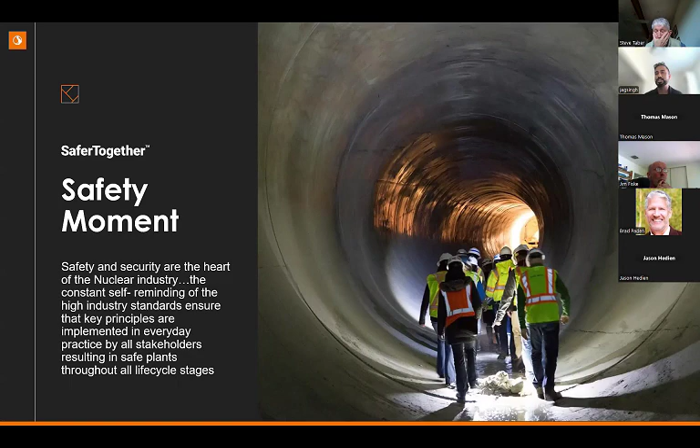We also talk about security as well. It's really important to understand that security is quite important when we talk about information and technology. We've got to be really careful. I'll touch upon it a little later in the slides when we're safeguarding information. A lot of technology here may end up having dual use, which is then subject to export controls. So it's really, really important. Safety and security in our industry go hand in hand.

We're going to talk about how that comes to fruition a little bit later.

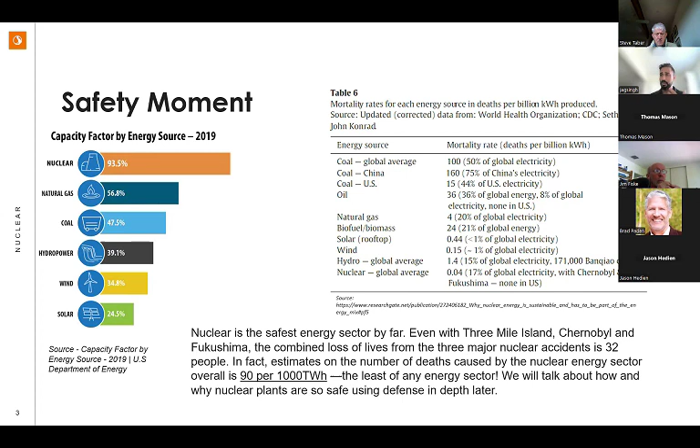So quickly, we're going to do a quick overview of the Canadian nuclear industry, because this is a very Canadian-focused PowerPoint, but I'll also touch upon the US since I have a foothold there with some of our team members. We'll talk about conventional reactor technology versus Gen 3 and Gen 4 SMRs and the difference between them, some concerns in safety, waste, and cost, some stakeholder organizations - skewing towards the US industry - design considerations, sector figures, and general infographics, which I find really useful in relaying messages, much better than just blocks of text on the slide.

So this is currently the Canadian nuclear market. Specific to SMRs, we've got utilities with SMRs within their sites, deploying those within their respective provinces. That's NB Power for New Brunswick, looking to put an ARC-100 reactor, a Gen 4 SMR, at their Point Lepreau site. Everybody's hopefully aware of OPG and what they're doing with Darlington, where they've got BWRX-300s. And most recently - I work very closely with SaskPower, now called SaskNuclear - they've recently identified the Estevan site, which will have two BWRX-300s going in there.

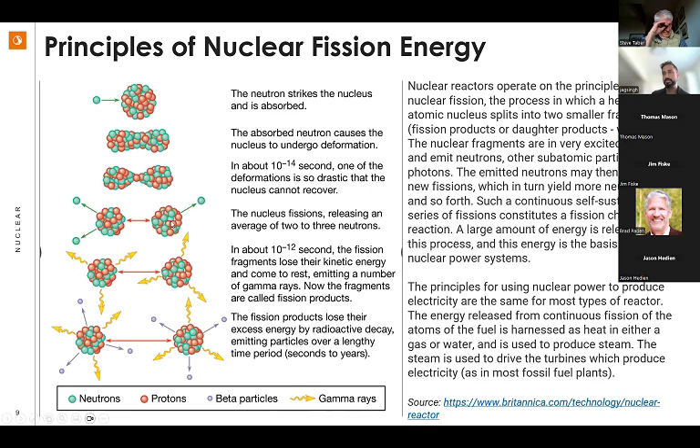So all the reactors in Canada have uranium as a base fuel, and right now in the conventional reactors, they're solid metallic fuel pellets. But some of these advanced small modular reactors, the Gen 4 small modular reactors, are starting to use liquid fuels.

The company I worked for before I joined Stantec is a company called Moltex. I was head of their engineering team there, and we were developing an advanced SMR, Gen 4 SMR, and we actually used liquid molten transuranic salts as the fuel. So it's really unconventional to use a liquid nuclear fuel, but that's the technology being developed right now. I believe even in the US you had the EBR2 prototype reactor. So although this technology is coming out as being this whole new foray on the frontier of science and technological innovation, SMRs have actually been around for a very long time, either in prototype phase or you'll find them in the back of a nuclear submarine or for maritime purposes.

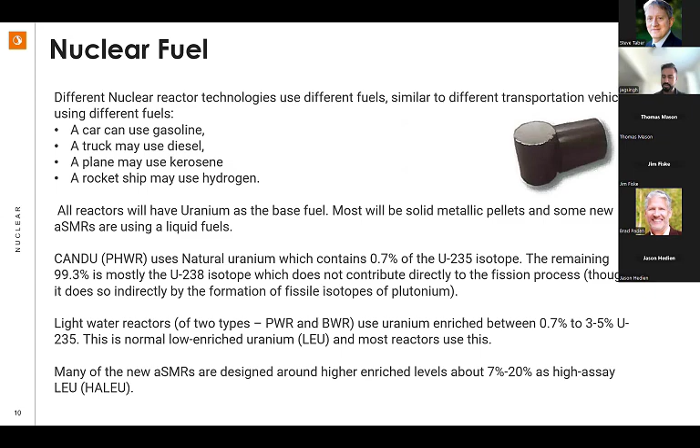Many of the new advanced small modular reactors actually have enrichment levels of 7 to 20%, and that's where we hear the term HALEU. A lot of SMRs use HALEU. We'll go into some of the problems with HALEU in terms of supply chain - a lot of it we were procuring from Russia, and obviously we can't do that anymore. So we're seeing this big push in the US to now start domesticating that supply of HALEU. We're going to need it for the advanced small modular reactors.

Okay, so let's have a quick look at some reactor technology types. This is a pressurized heavy water reactor. These are all CANDU reactors here in Canada, our conventional reactors that are in existence.

And this is what that CANDU fuel bundle looks like. Within each one of these pins, we have those pellets, which I just showed you, no bigger than the size of your thumbnail. We have those stacked up within each one of these - if memory serves me correctly, around 17 fuel pellets in each pin. We have 37 fuel pins that make up one fuel bundle, and one of these complete fuel bundles is represented by one of these red and orange blocks right here. That's the nuclear fuel.

And what we do, we circulate that heavy water, which is deuterium oxide, D2O, to get the right conditions in the physics, which is slowing down those neutrons to the right spectrum so that we can get that fission taking place.

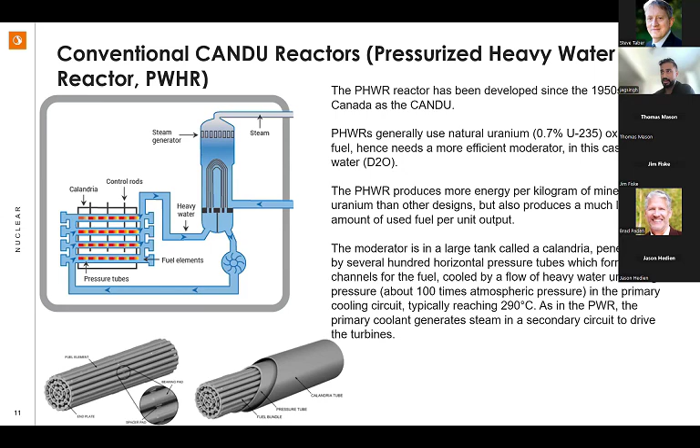Okay, so let's compare that to an SMR - a small modular reactor. Look at the size difference already - you've got a small person right here next to an SMR, and that's a core. Look at the size of what you need in a conventional reactor. We produce 300 megawatts electric typically around that range, or 100 megawatts electric, and we get economies of scale.

So we end up with a compact design, and the whole idea behind SMRs is actually machine line fabrication. You're supposed to be able to run these off a machine line, with off-site modular construction, off-site work acceptance testing, and factory acceptance testing, because a lot of the cost of construction delays can come down to having to do all that activity on a nuclear licensed site, which can make it very prohibitive from a cost perspective and a timeline perspective, because you have to have all the extra checks and balances.

One of the biggest parts of SMRs is walk away safe. In some of the reactor technology types, which I'll go into a little later, they actually shut themselves down - it's impossible to have a meltdown because they have a negative void coefficient, which means the hotter it gets, the less reactive it gets, and it just shuts itself down.

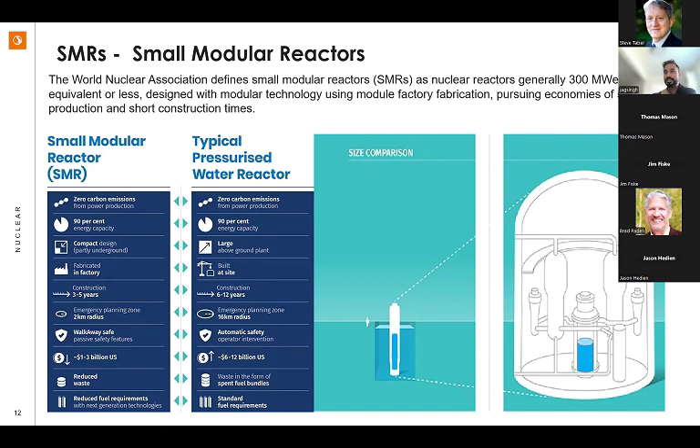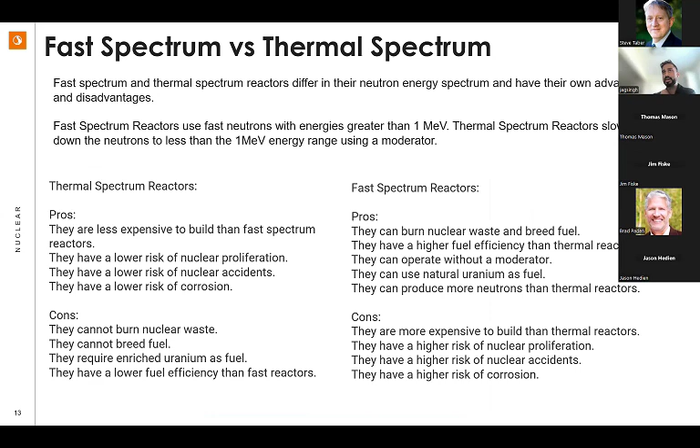Okay, and we also have reduced waste, we'll go into that in a second. I'm going to skip over this slide real quick, but there's two kinds of reactor technology types, getting heavily into the physics here - fast spectrum versus thermal spectrum, but I'll go into that in just a second with the reactor technology types.

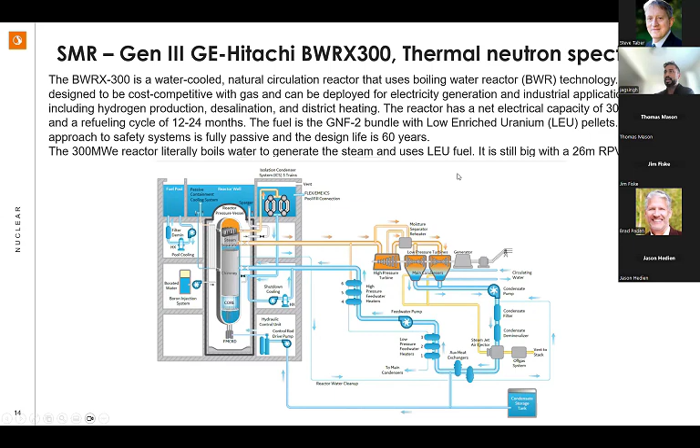We'll jump over to a Gen 4 reactor. This is the ARC reactor, which requires sodium metal coolant, liquid metal coolant. The fuel type changes here too - you end up with HALEU pellets. Because of the reactor physics and modeling behind this, you only have to refuel one of these every 20 years versus every 2 with a conventional reactor. So you can drop one of these down in a remote location and you won't have to touch that fuel for 20 years. That's currently what they're looking at.

Another key difference is the outlet temperatures of these. This is why a lot of the oil and gas industry and mining industries are starting to look at this reactor technology, because you actually produce very high temperature steam, which is directly applicable to applications such as oil sands and other heavy industrial processing.

So it sounds quite exotic with liquid sodium as the coolant, but actually prototype reactors - this goes right back to the Dounreay Fast prototype reactor in the UK. That was back in, I think, the 70s or 80s, they had that reactor technology type as a prototype.

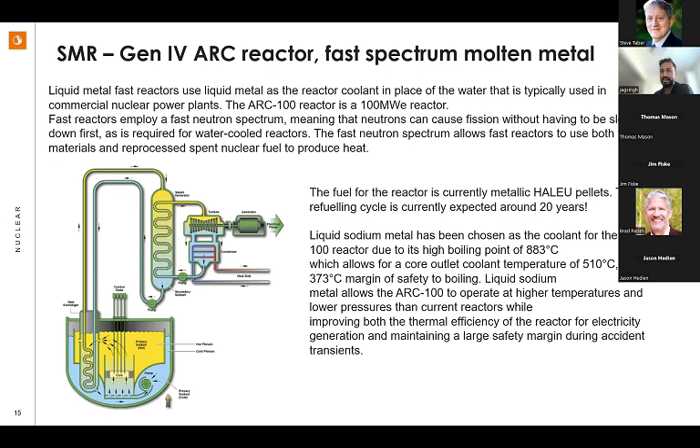Here's the company I work for, Moltex, and here we have liquid fuel in channels. Then we have a liquid molten salt primary circuit, and a secondary circuit is that steam cycle.

So we're starting to look at molten salt as an application, and the beauty about this reactor technology type is you can take existing spent nuclear fuel - currently seen as a liability across the entire world in some respects, although this technology is designed for CANDU spent fuel for now - and actually recycle that fuel and use it as new reactor fuel in this SSR-W.

What that means is, at the moment, the CANDU fleet stores their nuclear fuel in that metallic form I was showing you earlier, those CANDU fuel pellets. Actually only 20% of that is used in the fission process - 80% of that fuel pellet is still unused. So if you can separate out the 20% from the 80 and take that 80 and turn it into new fuel, you're essentially hugely increasing the efficiencies of that waste.

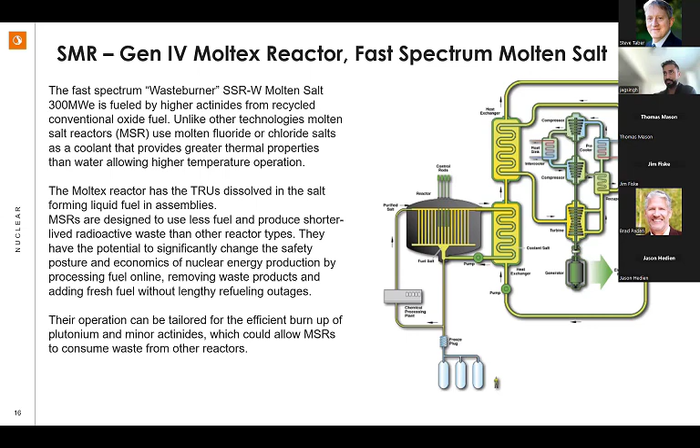Here's another one, a terrestrial reactor. This one gets really exotic - in this one you've actually got the nuclear fuel recirculating around a static core. These are graphite moderators. So you recirculate the fuel, which is really unheard of. And the temperatures you get up to are here. Again, each reactor technology has its pros and cons, but this is one in development as well.

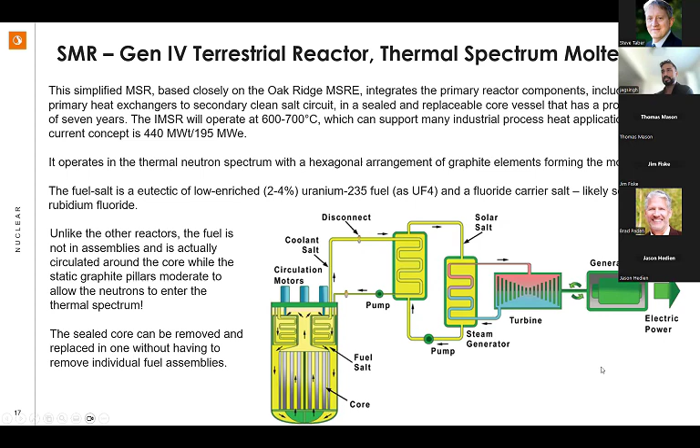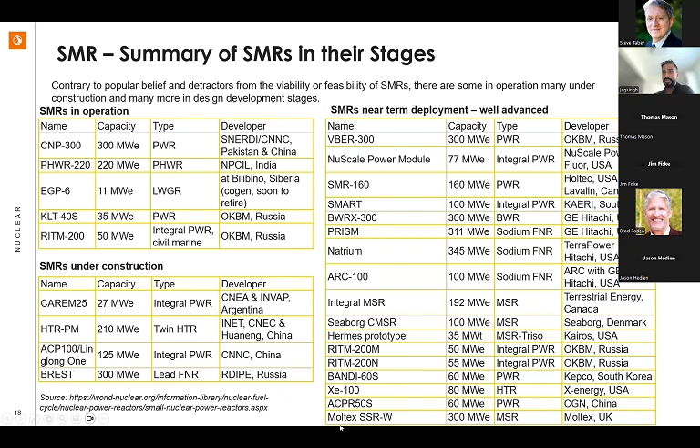So it's a really fun time for reactor technologies. There's a lot of SMRs in development stage, and there's quite a few that are actually in operation. The perception out there seems to be that there isn't any proven technology, but there is. We've got the PWRs, the heavy water reactors here in India, PWR in Russia, and integral PWR here, and there's a few under construction. It's quite important to understand that.

So we get to a few issues, challenges and concerns. Typical ones we hear are: what's the waste, what do we do with it, aren't these expensive, and they're not safe. Given historic issues with Chernobyl, Fukushima, and Three Mile Island, it's really important to start addressing these to a wider audience. So let's have a quick look at the negative void coefficient.

Here's a safety example I talked about a little bit earlier. SMRs use passive safety systems that rely on natural phenomena - we don't really have active shutdown systems anymore. The Moltex reactor actually had an emergency heat removal system which had no active components at all, it was all passive. A negative void coefficient is a great example of this as well.

This is essentially: as the reactor gets hotter and hotter, you end up with these steam bubbles forming in the coolant, which gives a negative feedback to the actual reactor. If it starts to overheat, the more those steam bubbles get generated, then that reactivity decreases - this is a self-regulating feature.

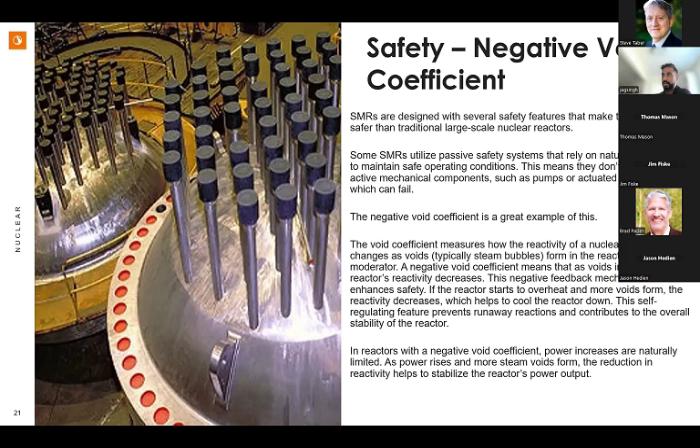Here's another one: versus the reactor technology itself, the actual fuel is now becoming safer and safer. It's a TRISO particle, and this is being developed in the US with USNC, and X Energy are also going to be using this specific fuel source in their reactors.

Where I talked about those pellets held in sheets and rods earlier, these are actually little balls, and the fuel itself is encapsulated. These pellets have been tested to withstand really extreme temperatures and harsh environments, and they keep those fission products, the daughter products, which is the waste, all retained within this particle.

So you can imagine how appetizing this becomes for either refueling or waste management or anything in between. Safety is now being innovatively ingrained, not only in reactor technology type, but the fuel itself. We're just seeing things get safer and safer.

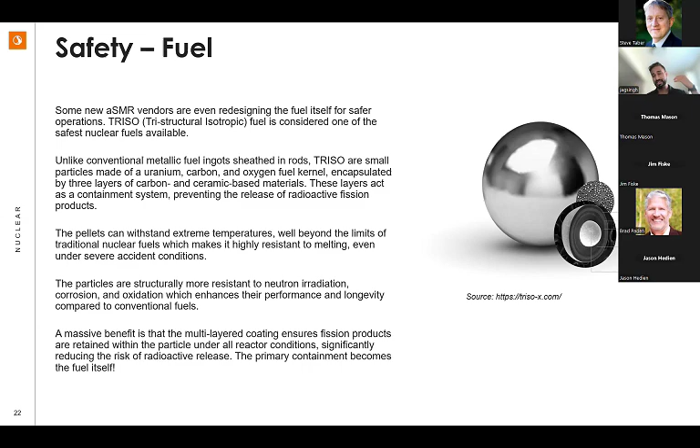When we talk about waste, it's really important to address this. Most of the waste that comes out is actually LLW, and we talked about that unused uranium, the 80% there. Only very small amounts of this is actually considered high level waste.

The reason behind that is because those daughter products, the most radioactive material produced as part of the nuclear fission process, have that half-life — it decays really quickly. So some elements and components are actually around for even a fraction of a second. So really, the more dangerous things are in terms of high-level radioactive waste, the quicker it decays away. This is why we end up having storage ponds on nuclear reactor sites.

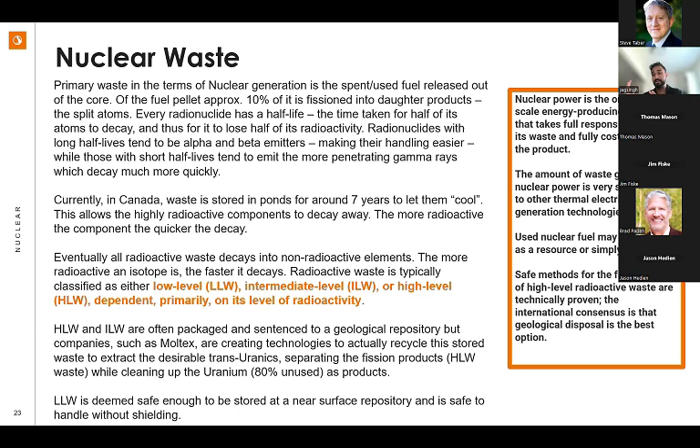As soon as that fuel comes out, it goes into a pond and stays there for 7 years. This is where they let it cool, which lets the most radioactive components within that fuel decay away. So you end up with most of that waste now being ILW and LLW. It's really important to understand that.

When we start looking at the amounts of waste, this one's really key — I'm going to get into infographics heavy here. If the US has produced roughly 83,000 metric tons of used fuel, which is the entire fleet generating over 60 years, all of that could fit on a football field at a depth of less than 10 yards. That's the entire amount of nuclear waste that's produced.

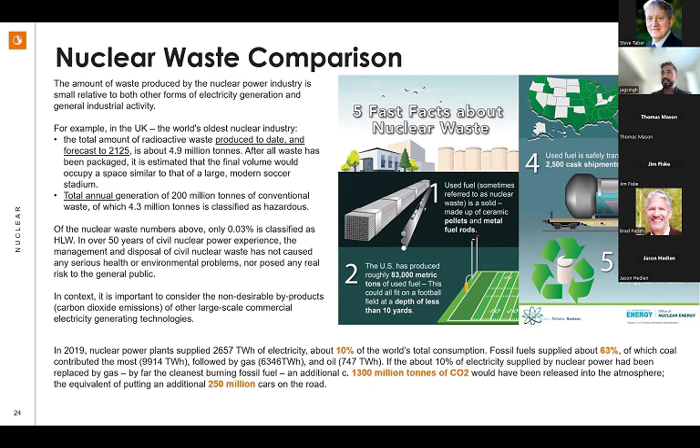So let that sink in — 60 years of the entire fleet of the US, that much energy produced, there it is right there. And it's really dense, okay? That's the reason why it's all kept within this.

Remember, this is all carbon free, so you're not having any carbon dioxide emissions as part of the process that's producing that. It's truly clean energy and it provides that stable base load as well. When we talk about solar and wind and all the intermittent supplies, yeah, they're also carbon free, but when the wind isn't blowing and the sun ain't shining, that energy capacity comes into factor, and your actual waste produced per unit of electricity generated is actually quite high.

So when we start looking at some of these, per person in the UK — we have quite a big nuclear program — they produce 0.84 liters of waste per person. Of that, most of it's low-level waste. A small portion of it is intermediate level waste, and a very small proportion of it is high-level waste.

So this is the one that's really dangerous, but per person, every year, it all fits in a bottle that big. And that's for everything — that's the food that they eat, the energy required for the houses, for the clothes that they wear, for everything.

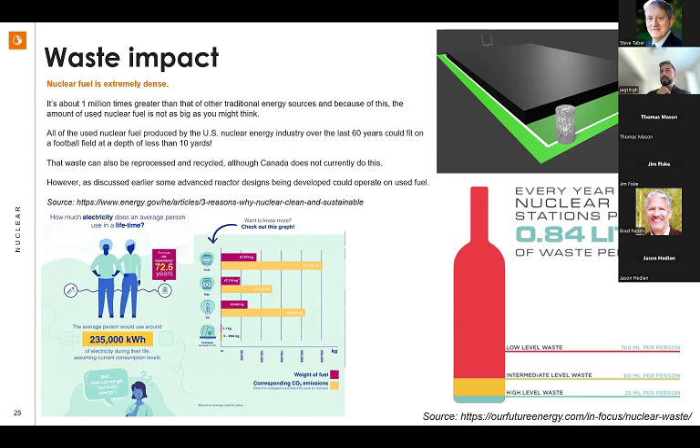All right, let's have a quick look at the economics. With the economics of a nuclear reactor, you hear overnight capital costs, and I guess a lot of people are a little bit scared, right? You hear $1 billion for a plant.

But it starts making sense to look at nuclear when you look at the levelized cost of electricity over an amortization period of about 65 years, which is the life of a nuclear plant. You can also do plant lifetime extensions to get even more out of it. When you start looking at LCOE over 65 years, things become very competitive, really competitive.

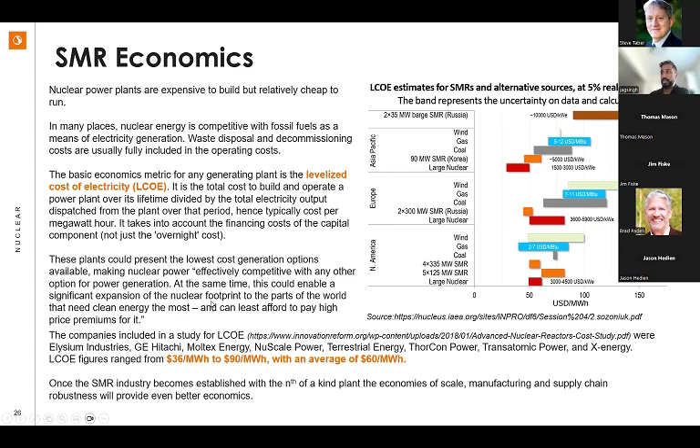Going back to recycling and reprocessing - the US generates about 2,000 metric tons of used nuclear fuel a year, but spent fuel still contains more than 90% of its potential energy. I use 80% in Canada, but 80 to 90% is unused, and you can recycle that into new fuel. And we're talking about conventional fuel there.

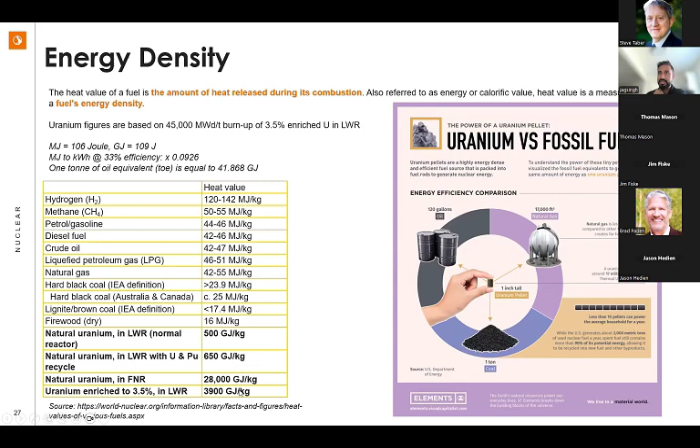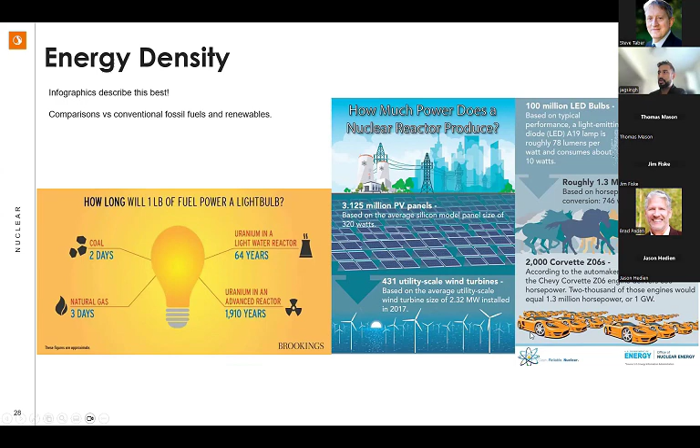Here's a comparison to wind and solar. You can see you need 3.125 million PV panels to get to the same amount that a nuclear reactor will produce, and 431 utility scale wind turbines for the same reactor. I won't go over the rest of these - you've got a copy of the presentation, and it just goes on and on, showing how efficient it is.

I'm getting close to time on this, so I'll quickly skip through some of these, but radioactivity is a key one I really like explaining in some detail, because it's key to getting a real perspective on radiation and a lot of the concern out there in industry. We use bananas to do so in this specific presentation.

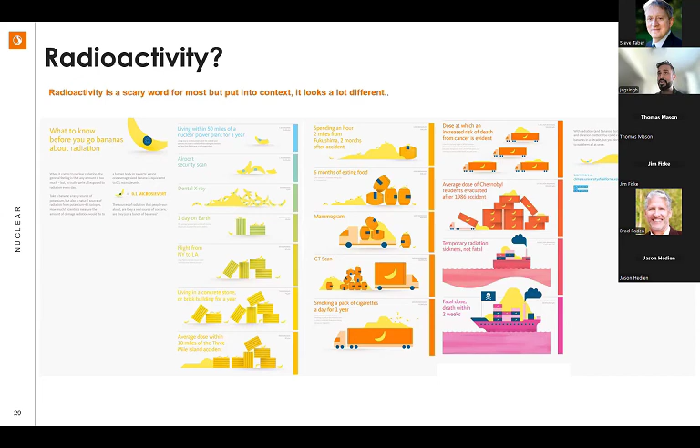Okay, I'm going to skip over these ones. This is CNSC. If you'd replace this with the US NRC, the Nuclear Regulatory Commission, that is the regulator for the United States. IAEA is the overall umbrella across the world, and the US NRC has to link up with the IAEA. They're essentially, for all intents and purposes, kind of the parent organization to make sure—the IAEA is mostly about peaceful use of nuclear energy and making sure we implement the right safeguards. The US NRC will start putting regulatory oversight onto specific how you execute design.

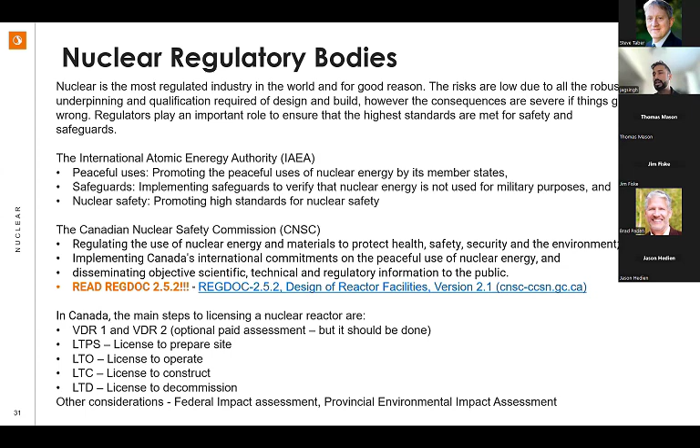For example, here's the Canadian version. The NRC will have their own version. The licensing with the US NRC is different to Canada. This is Canadian. With the NRC, what we're starting to see with SMRs is a combined license application. You typically have a couple of licenses that you got to have for a nuclear power plant project, an SMR project in the US.

For waste, we have the NWMO here in Canada, and I know you've got Yucca Mountain, I believe, for your deep geological repository, although I hear that's put on hold. But the US—in fact, I don't know too much about the US waste program, but I believe it's all privatized for the decommission aspects of that, so don't quote me on that. I'm not too sure how nuclear waste is handled in the US, but I believe it's still tied to those facilities that hold the license.

A huge emphasis for us is First Nations communities and making sure First Nations communities are involved in the planning and implementation of those facilities and waste facilities.

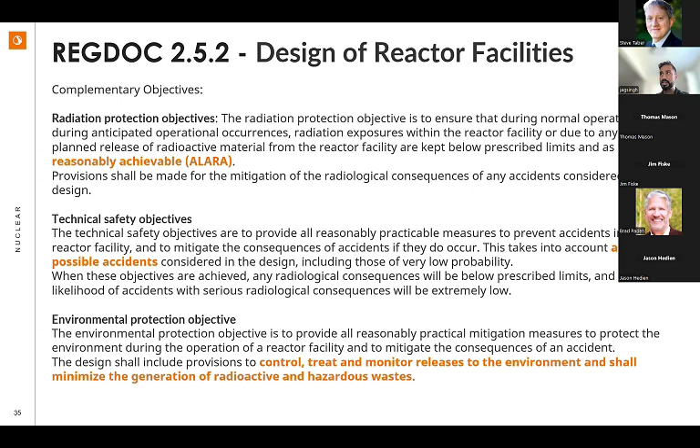Okay, so ALARA, Defense in Depth and Design—we have to go to a level of substantiation that is typically outside of conventional nuclear plants, conventional energy plants. The idea here is we want terms as low as reasonably practicable or achievable, and we want to mitigate any kind of issues that may arise.

So I've got a background in offshore oil and gas as well, and there we have our checks and balances and HAZOPs and whatnot. But here, safety is really, really ingrained from first principles engineering, and that risk profile is mitigated through design.

So we have various levels of defense in depth here, right? Prevent deviations from normal operation, detect and intercept deviations, minimize the consequences of level 3 of accidents. Level 4 is to ensure radioactive releases are kept as low as practical—we should never get to that stage anyway. Level 5 is mitigate the radiological consequences of potential release of radioactive materials. Everything about safety in the nuclear aspects, the biggest parts of that nuclear sector and nuclear engineering, is around confinement of radiological material.

It's really, really important - that's what safety cases, nuclear safety cases are about. The emphasis is on confinement of radiological material. That's why containment structures have to be designed to withstand aircraft impacts from Boeing 747s, for example. You wouldn't need that on an oil platform, but you need it on a nuclear platform.

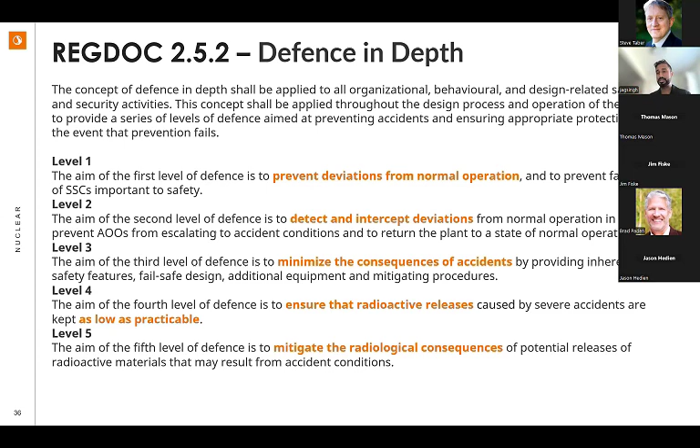So if the capital cost of a new build is estimated between 300 million and a billion for a first-of-a-kind SMR, this is a multi-billion-dollar market just for SMRs in Canada alone and the whole of North America. We're talking multi-billion-dollar industry.

The IAEA, which is that global umbrella I talked about, has some projections talking about 390 gigawatts to almost 500 gigawatts of electricity by 2030. We saw during COP and the Climate Action Summit there's a declaration to triple nuclear energy, signed by 22 countries across 4 continents - potentially hundreds of billions, even perhaps a trillion-dollar industry globally, if we look at what that really entails.